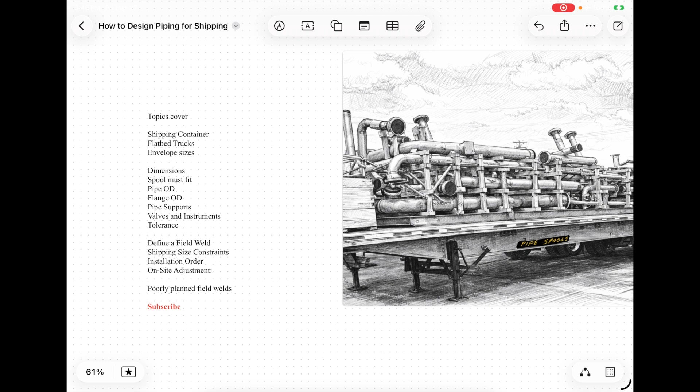Take into account the piping OD, flange OD, pipe supports, valves and instruments, define the field welds, shipping sizes, constraints, installation order. Poorly planned field welds really hurt your design and really hamper construction. So you want to take that in consideration.

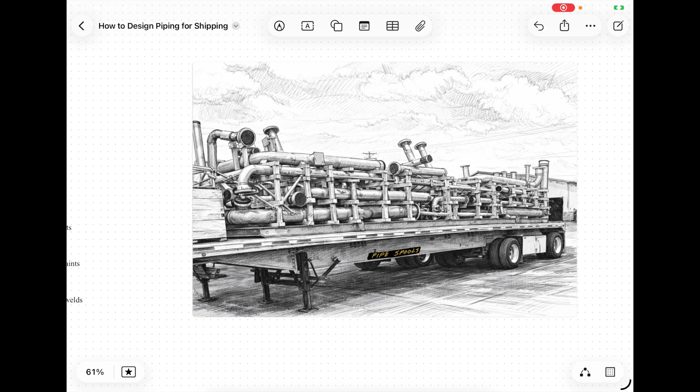Here I'm showing a flatbed with spool pieces loaded up, how the fabricator or the shipper has it with blocks, and how they stack it and safely ship it from one place to the other. More likely from the fabrication shop to location at site, it probably won't be this orderly or need as many shipping supports, but they'll just lay flat on the bed and then be shipped to the unit or to the area.

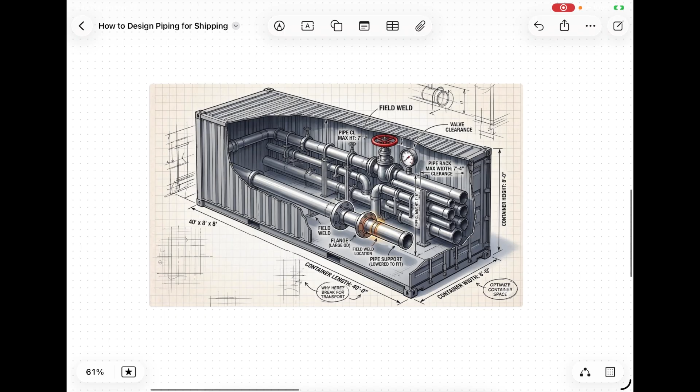If they're shipping it through cargo ship overseas, or it's coming in overseas to your location, sometimes we go to fabricators offshore too. So this is just a rendering of what would be in a shipping container and the sizes. Shipping container size is 40 by 8 by 8 feet. In some cases, it's for small bore pipe.

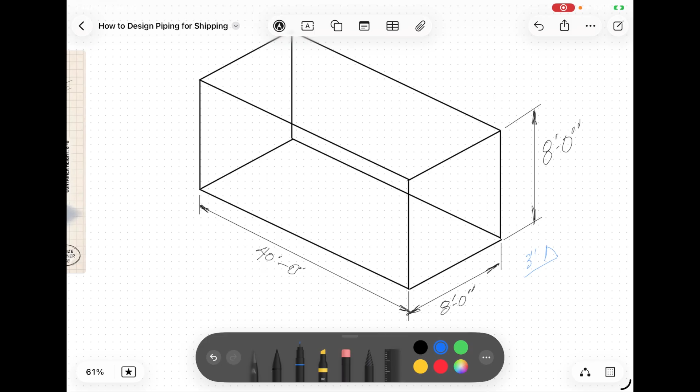Small bore pipe is 2.5 inch and below, and large bore pipe, which is what I'm talking about in this video, is going to be 3 inch and larger pipe that needs to be designed for a 40 by 8 by 8 container.

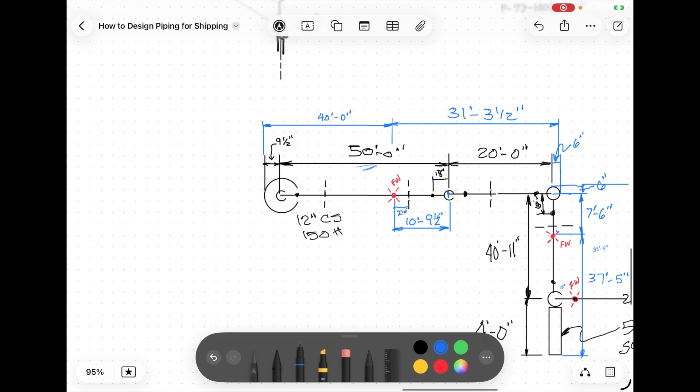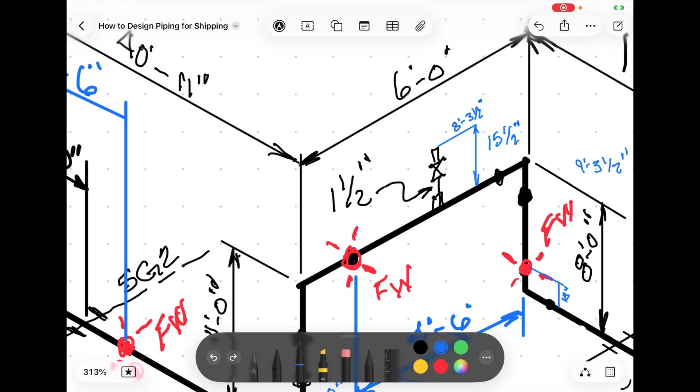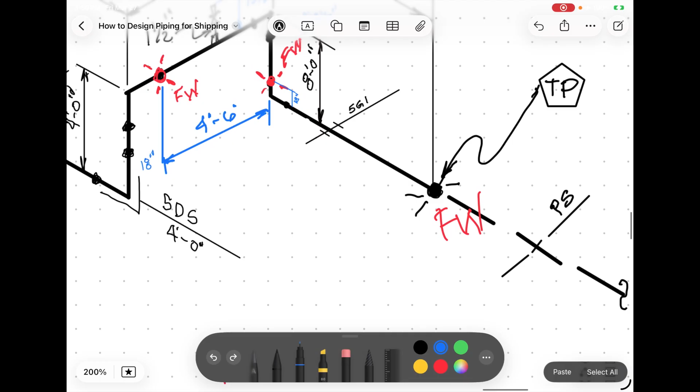So we got a flange here that we got to take a look at. Here's a dummy leg or a trunnion that's sticking out 4 feet that we got to look at also. And then here we have a vent that we need to take into consideration. And in the ISO, I'm imagining it stopping at a tie-in point. So let's go back to the plan view and start at the flange.

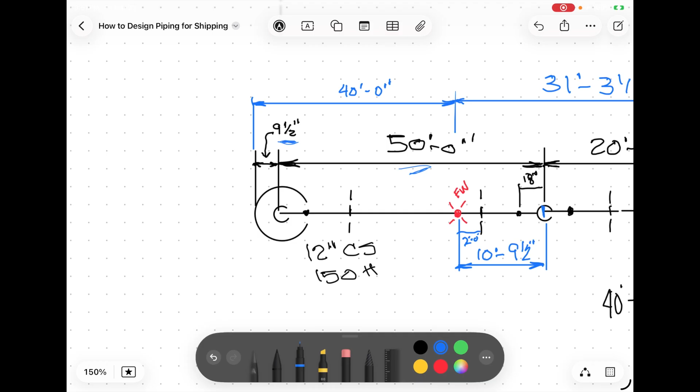So in plan view, we have the flange. We have the OD of the flange. From the center line to the outer edge of the flange is 9.5 inches. So you need to take this into consideration in the design. You don't want to look at just the dimensions that are on the ISO. Like this ISO here, it only says 50 feet, but you know that's not going to fit in the shipping container. So in order for it to fit in the shipping container, we'll break that down.

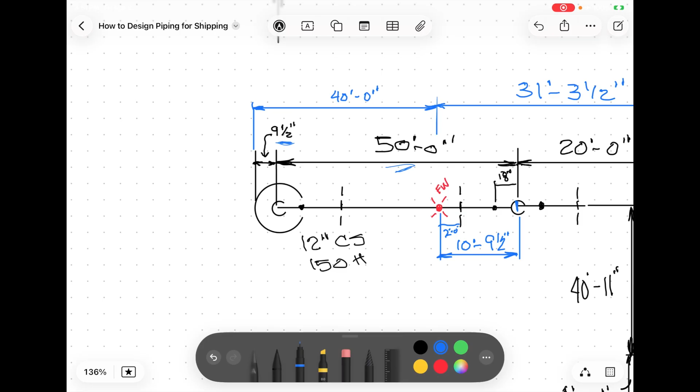So here we need to cut it back. We need to take off at least 10 feet. So that's past the 8 foot support, but we need to make it 40 feet from the edge of the flange to this field weld to keep it within 40. So then we'll need to take out 10 foot 9.5 inches to locate our field weld. So with that explanation, we've cut our first spool piece that'll fit.

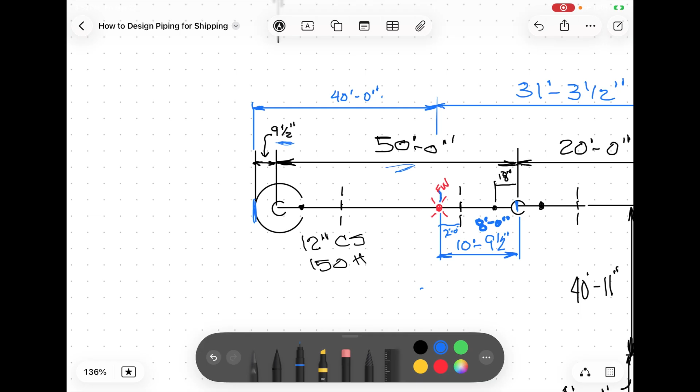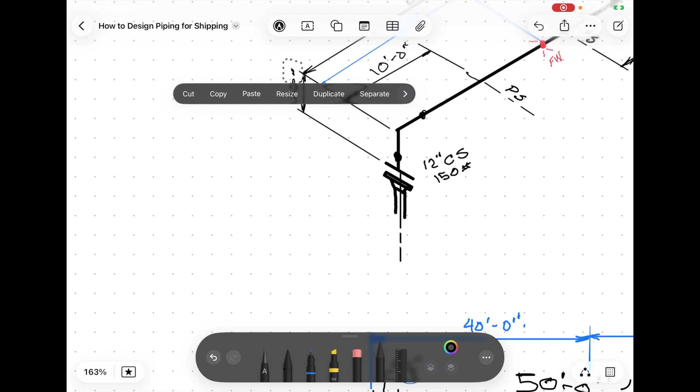And then the vertical, the flange got a vertical of 1'2". So that won't work. So let's just make that 2 feet. Those numbers don't work, because this elbow is 18 inches on a 12 inch. So that number's not going to work. So let's cut that. Just for talking purposes, let's just make this 2 feet.

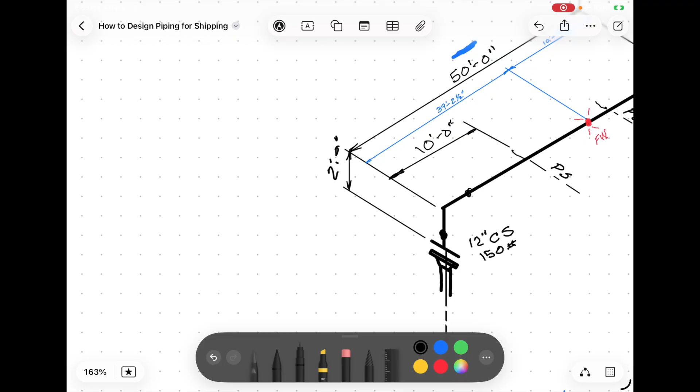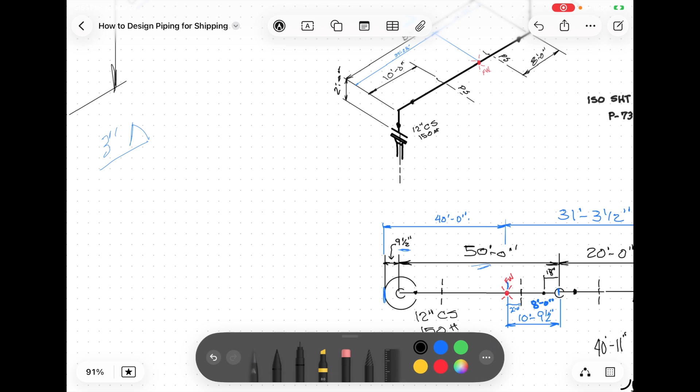Which still fits in our shipping envelope. But I don't want somebody to say, hey, 1'2" is not going to be enough for a 12-inch elbow. So that should work out. And probably have another dot. But anyway, so the spool piece here is 40 foot long.

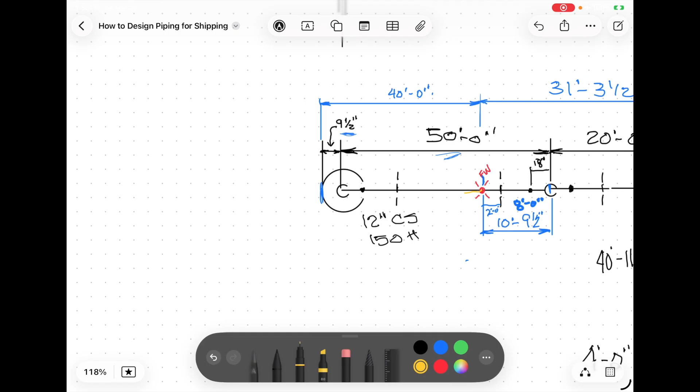So we've located our first spool piece. So we'll highlight that yellow, and we'll call it 001 spool piece.

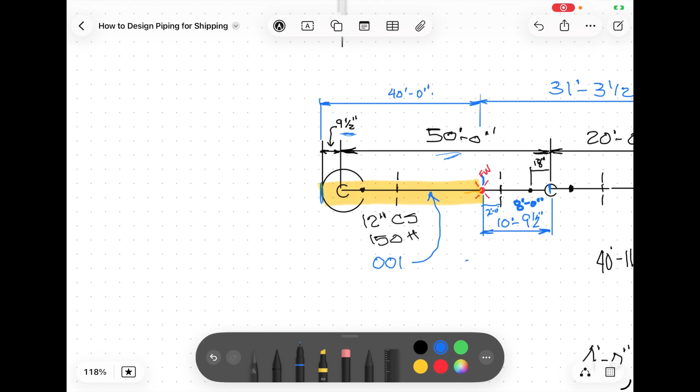Let's break down the second spool piece. So if we're going to break that down, we need to go from the field weld that we just located, this field weld here. Let's go with that. And so we got 10 foot 9.5 to the center line of the elbow, which will cover the point of support.

And then we'll have from the center line of this flange here, center line of this line, we have 20 feet to the center line of this elbow here going down. So with that distance, 20 foot plus 10 foot 9.5 gives you 30 foot 9.5, but you got to take this 6 inches into consideration for half the OD of the pipe, for a 12-inch pipe, right?

So then if you do all that, from the edge of the pipe to that field weld, you got 31 foot 3.5 inches, which is well within the 40 foot length. So then I'll normally break down, okay, so we can add a little bit more here. If I know that this one is well beyond the 40 foot length, then I'll start working my way back from a point. So then I'll take some out of this 40, which I'll take 7'6",

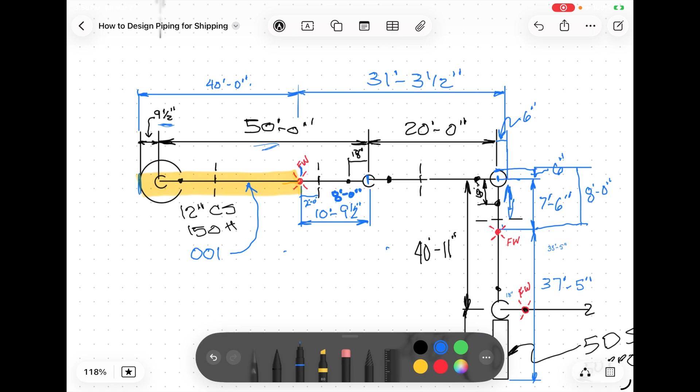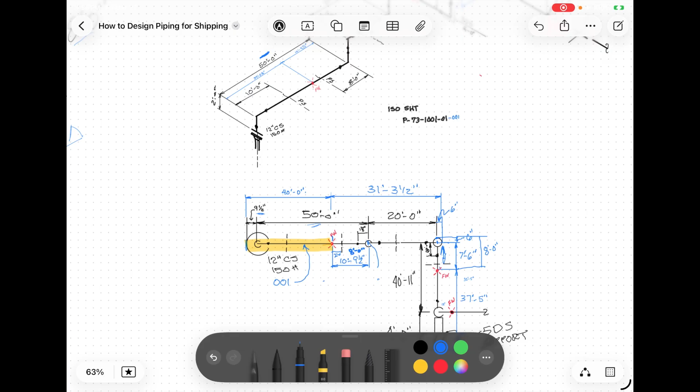But we have an elevation here, don't we? Let's see, what was it? It was 6 foot, so we're still good. So it's 6 foot and then 6 inches for half the diameter of the pipe and half of the diameter of the pipe on the bottom. It gives us a 7 foot overall distance. So what are you talking about, 7 foot?

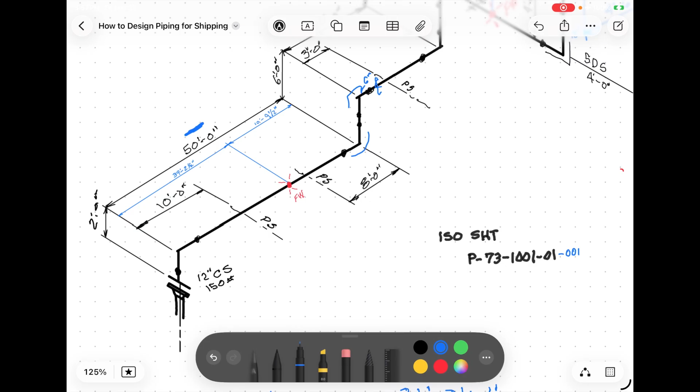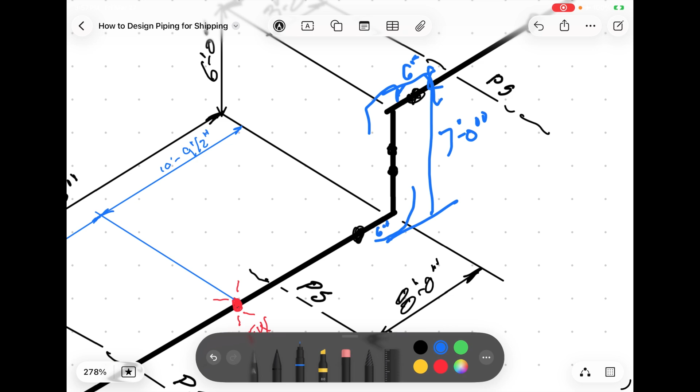So let's pretend we got the edge of the pipe here, and the elbow goes down, and the edge of the pipe that goes here. This represents the center line, right? In here we have 6 inches, and in here we have 6 inches of pipe, half the OD. So these two 6 inches plus the 6 foot gives us an outer dimension of this spool of 7 foot 0 inches, well within the 8 foot, right?

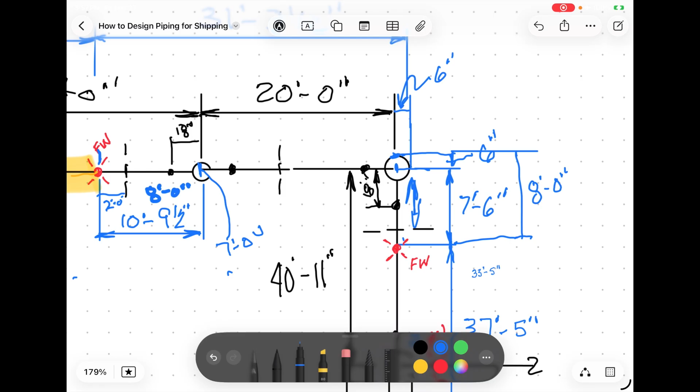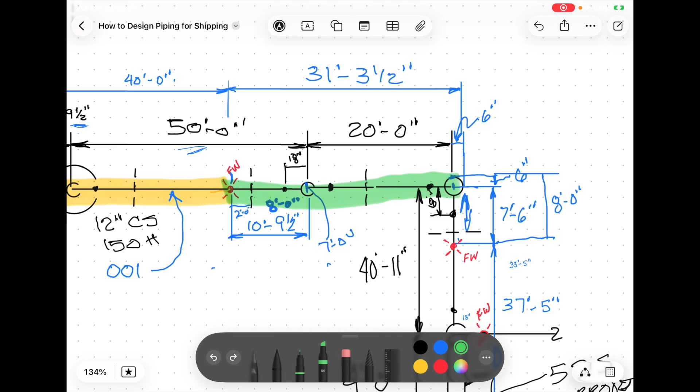So let's go back to the plan view. So then we got 7 foot here in the vertical, and we got our 31 3.5, which is within the 40, and then over here we have our 8 foot. So this fits in the box also. So let's color this spool piece. Let's highlight that. Oh, wrong color. Let's go to green. So this is our second spool piece here, vertical.

Let's go to the ISO. On the ISO here, I got it at 7'6", but you got to add that little piece, like I just said, the half diameter of the pipe, so that'll make that 8 foot. So we've got our second spool piece here, here, here. So that's spool piece 002.

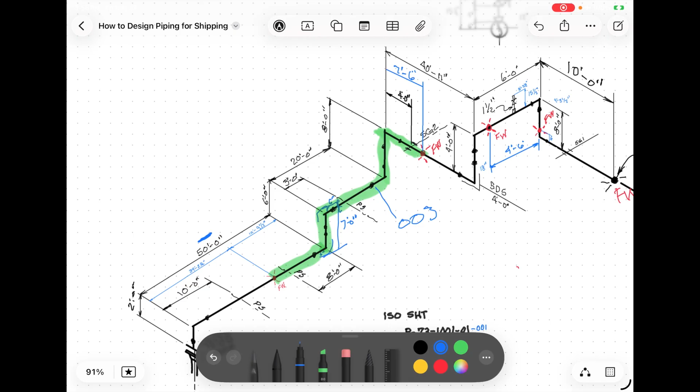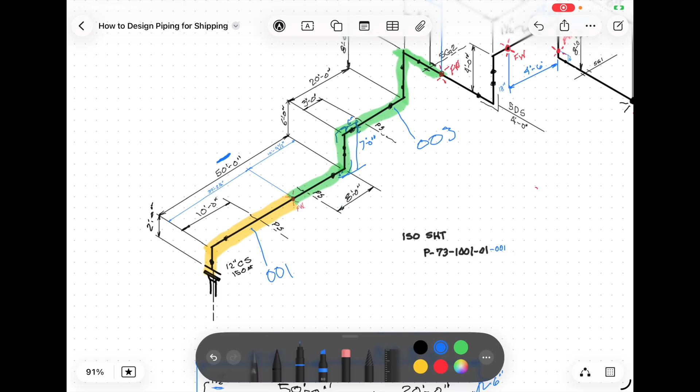I guess we better do this one too. This is yellow. This is spool piece 1, spool piece 001. Oh, I'm sorry, this is not 3, this is 2. Spool piece 2.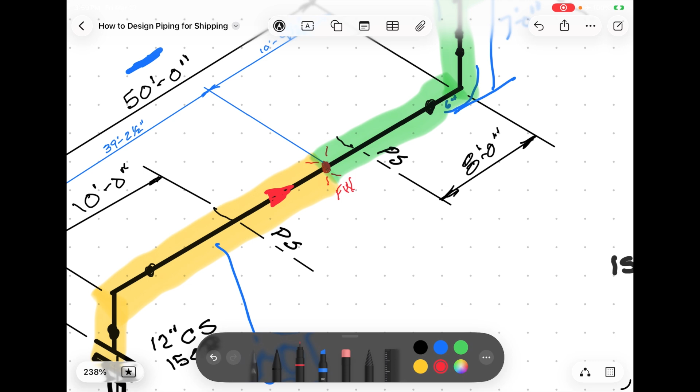And I like to keep them with the flow. It depends on your lead or the project or who you're working for, but I like to keep them with the flow. That's what I tell the designers that I'm working with. So we'll keep the spool pieces with the flow. So let's go to spool piece 3.

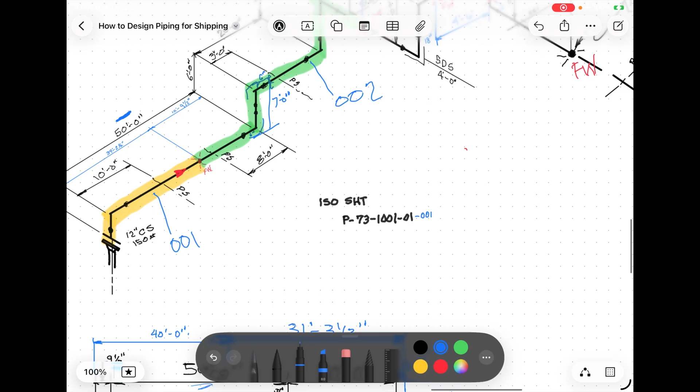Spool piece 3 is a little tricky, but it's good for you to learn that you got to take this trunnion, this 4 foot trunnion. It won't be dimensioned on the ISO, but it'll call out the support. Nowadays, they normally just call it out, it's the 5DS, for instance, for talking purposes.

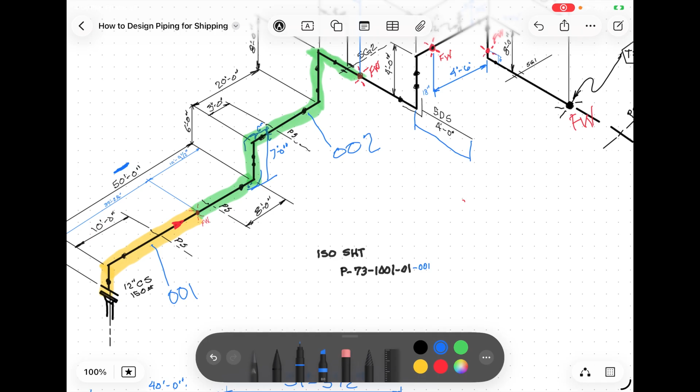And it's got 4 foot. 4 foot what? It sticks out 4 feet. It's something that you've got to take into account. Experienced guys know this. Inexperienced guys, it's something they've got to learn. So that's the 4 foot right there.

So if we go to the plan view, we have 4 foot, and then we made this cut a few minutes ago at 8 foot. So that leaves our 40 foot 11 to the center line, minus the 8 foot, plus the 6 inches, gives you 33 foot 5 here. And then with the 4 foot gives you a total length of 37 foot 5, which creates our second one.

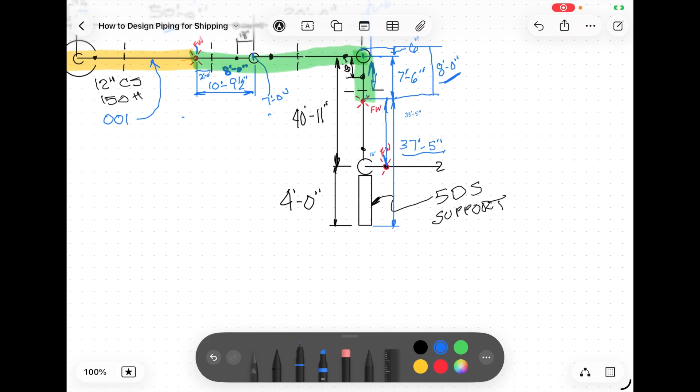But we have a vertical here too, don't we? So what was the vertical on the ISO? The vertical is 4 foot plus the outer, so that's adding a foot to that. So the overall there is 5 foot. So we have a vertical here of 5 foot, which fits within the

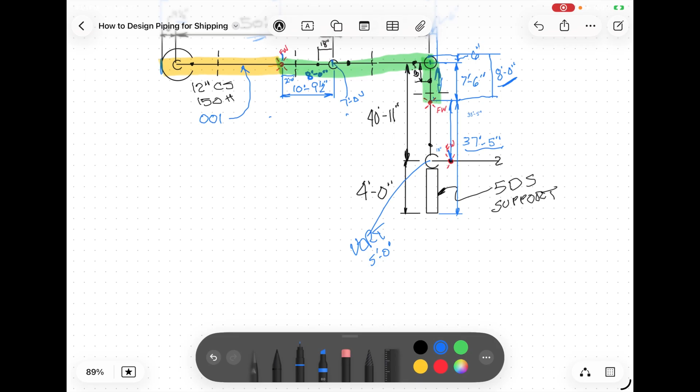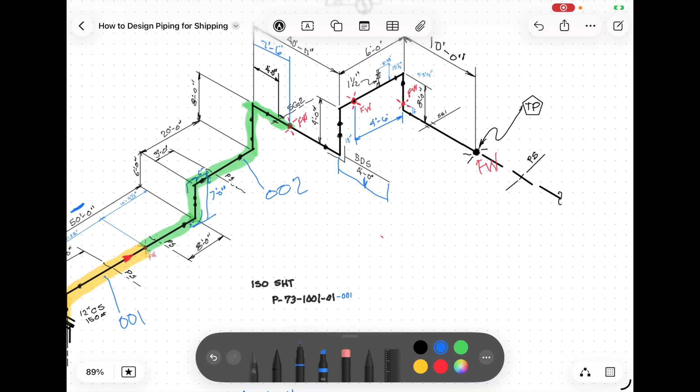shipping container. So in this one we have a shipping container, and I did the field weld there because if you do an overall look, this is 6 foot plus the outer 6 inches, and then we also go up with the vent valve. So we'll need to take that in consideration, but let's finish this one here, and we'll highlight this one blue.

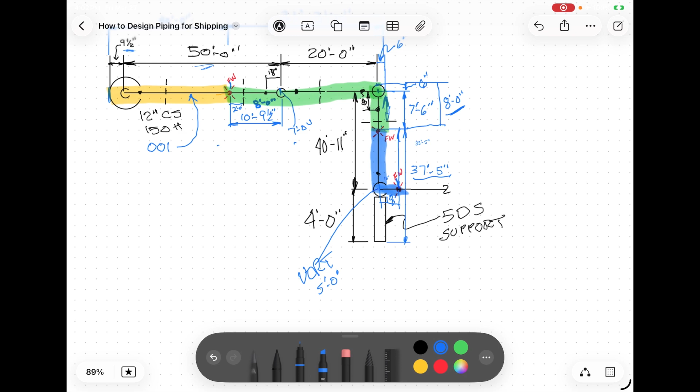And this dimension here is 18 inches. From the center line to the center line is 18 inches. So this spool piece is well within our 8 by 40. So let's just break the rest of it down on the ISO. Since we got the parts pretty much broken up, I have the ISO here. So this was spool piece 3, right?

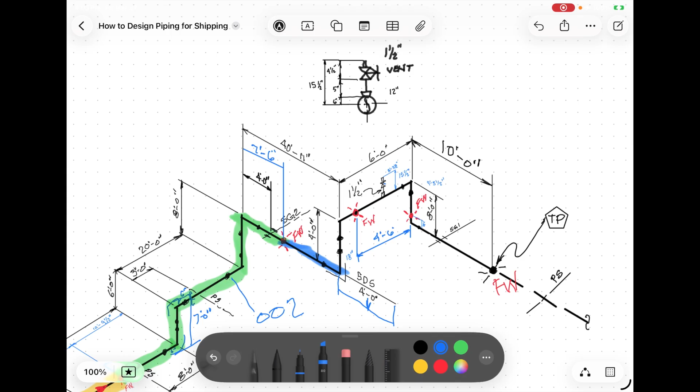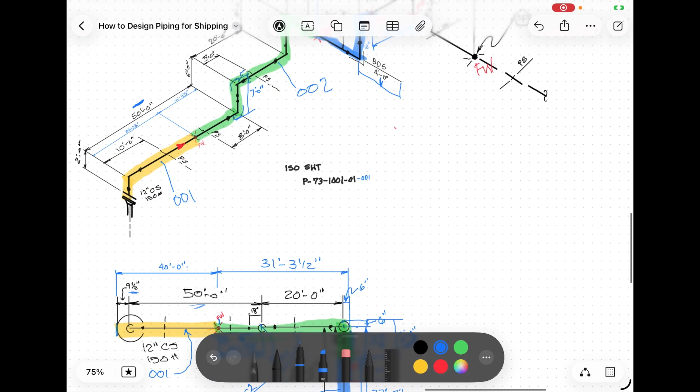Yeah, I didn't number it down here either. So this is spool piece 002, spool piece 003. And let's go look at the 4th spool piece. Here you have the vent. So I've broken it down: a 12 inch by 1.5 inch olet with a 3 inch nipple.

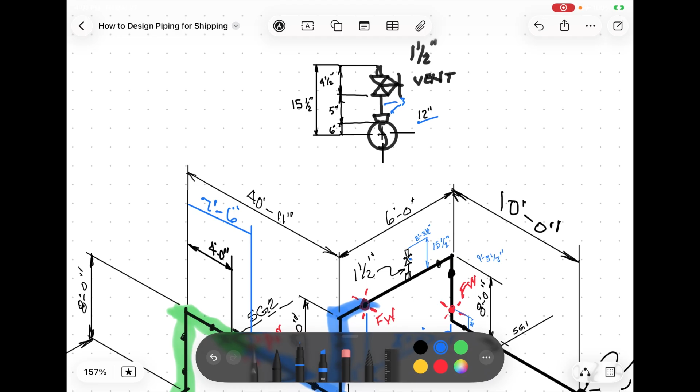So I'm saying it's a total of 5 inches, and then the valve and the bull plug, which I'm saying is 4.5 inches. So in total, from the center line of the pipe to the edge of the bull plug is 15.5 inches. So with those 15.5 inches, when you're breaking this spool piece out, it's 8 foot. So with adding the 15, you're already over the 8 foot distance.

And this is 4'6". So then we'll take the 18 out, break this up a little bit to get it back within the 8 foot. So if I don't put this field weld on, it will be oversized in 2 directions. We'll have almost 9 feet in the vertical here, which we don't want, and then we'll have 10 foot here. So we need to break that down and just break it out into 2 spool pieces.

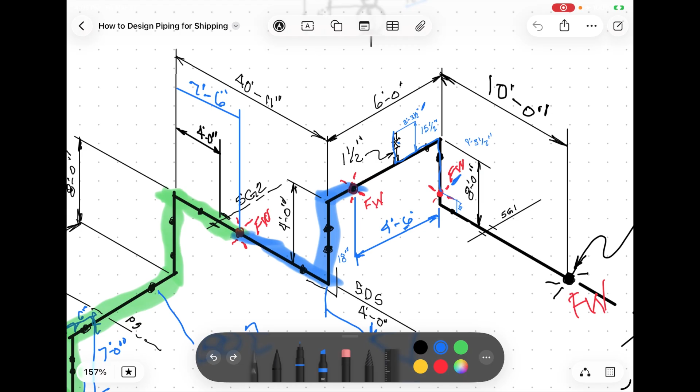This is 4'6" by 8 foot 3.5. So this 8 foot 3.5 is going to have to be considered as the longest piece, which is over 8 feet. So it'll be in the 40 foot direction to fit in the container, which will be from here. All this will be over the shipping length. But let's get back to finishing this out.

So we added the 15.5 inches, and we worked it out to where we've got to take the 18 inches off to locate this field weld, and that'll give us a spool piece of 8 foot 3.5 inches. So that'll be our fourth spool piece. So this will be 004. Let's color that one yellow. Nope. Let's color that one yellow. Okay.

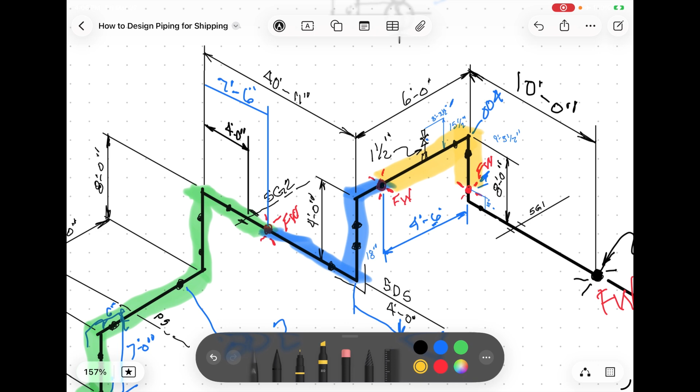So then we come up with our last spool piece, which is 10 foot by 18 inches. 18 inches is the elbow for a 12-inch line. So then that'll be there. So this will be our fifth spool piece. Sometimes you've got to break them down to small pieces, but as long as they fit in two directions, you should be all right. This is our last piece here. Let's color that one red. From there to there. And that'll bring us to our tie point.

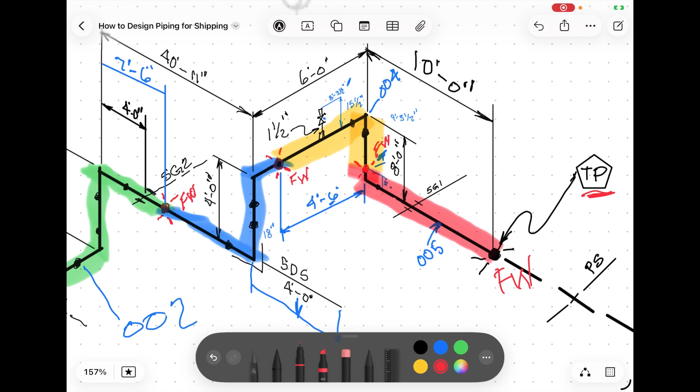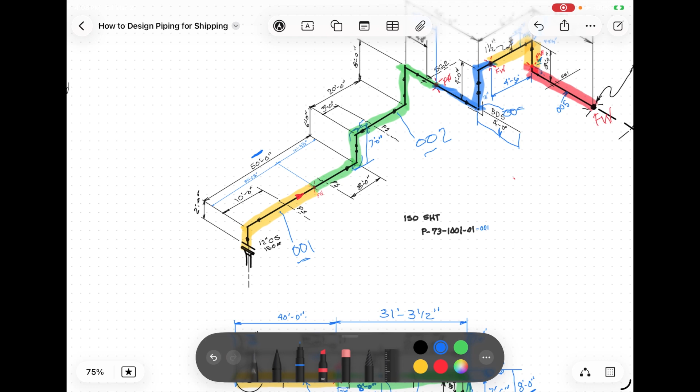And that is how I typically take a look at the spool pieces. One thing to add, you can see we have 5 spool pieces. And with these 5 spool pieces, 1, 2, this one's spool piece 03, 4, and 5. So typically on the spool piece number, it'll be the ISO sheet number.

So in this example, it's the fluid code, the unit, the line number, the sheet number of the ISO, and then this will be where the spool piece number comes in, in most cases. Most companies do it that way. Maybe it'll be a whole gyration of numbers, dashes, no dashes, but this is the spool number.

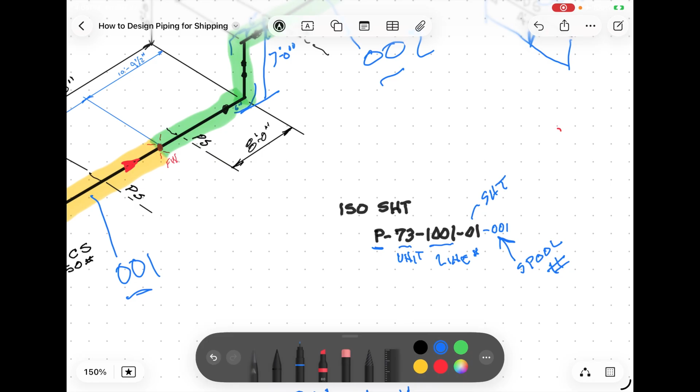And this will help construction locate the unit, the line, and then this will tell them what ISO it's on, and then this spool piece. And then your ISO will have each one identified in your material for the fabricator.

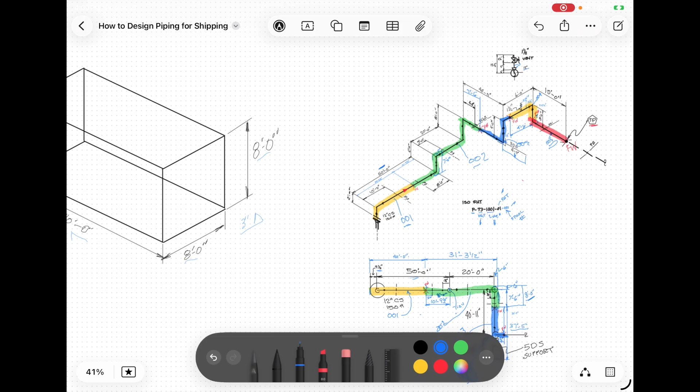So in design, we'll create this whole spool, this whole ISO. I would put all this on one ISO. That's why it's not that complicated with valves and everything in it. You could probably fit 5 spools. Maybe you need to break this down to a sheet here. Let me get a little bit neater than that.

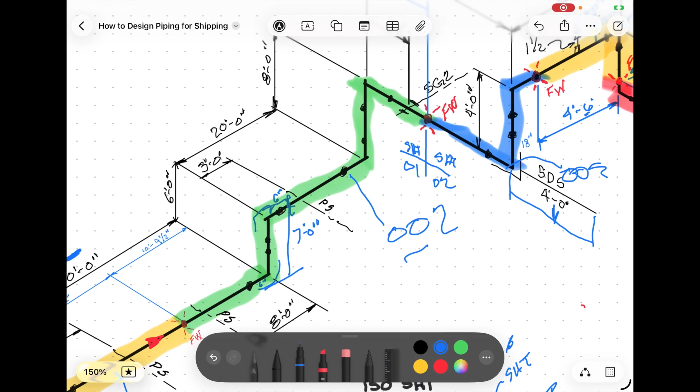So this here will be, if you break it down by sheets, this would be sheet 01. This will be sheet 02. If that's the case, then your spool numbers will start over because they start over on the line on the sheet. Most people do it that way.

Some people start from 1 to whatever, but typically on S3D, if you do the sheet number here, sheet 2, then this will be your spool piece 001, and this will be your spool piece 002, and this will be your spool piece 003.

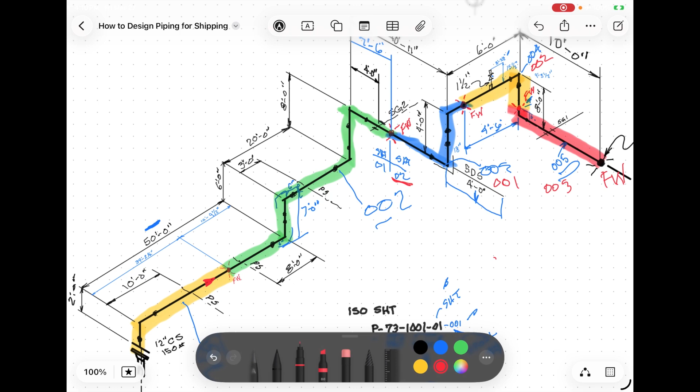Typically now in S3D, this is all broken up for you, but this is the thought process on how to design piping for shipping that you need to take into account. A lot of people nowadays just route pipe in the model, make it look pretty, but there's a thought process behind it, and I hope you get something out of this.

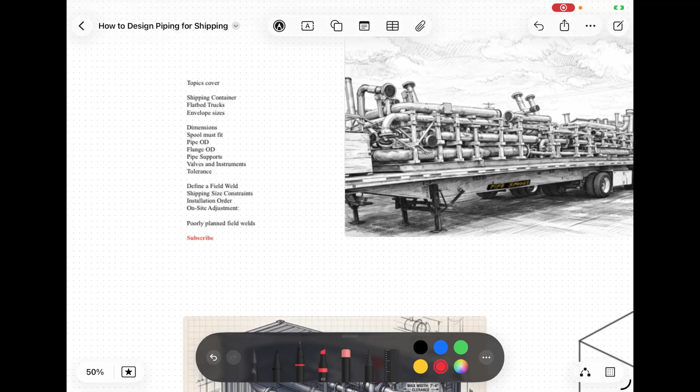Again, let's go down the list here. Maybe I covered everything. Shipping container. We showed you the flatbed. Envelope sizes, dimensioning, how to dimension it, sketch it out. Spools, they've got to fit inside whatever the project decides needs to be the spool. So this needs to be asked early on by the designer.

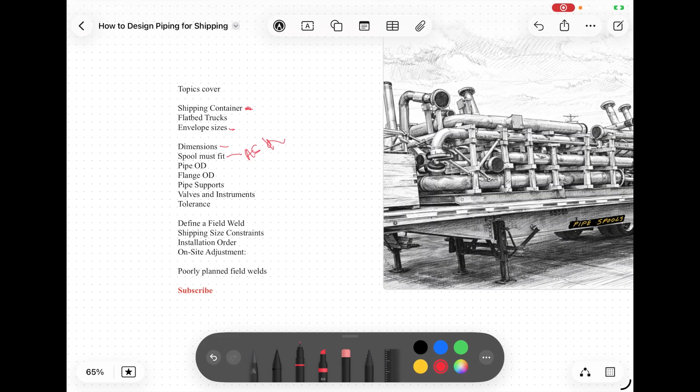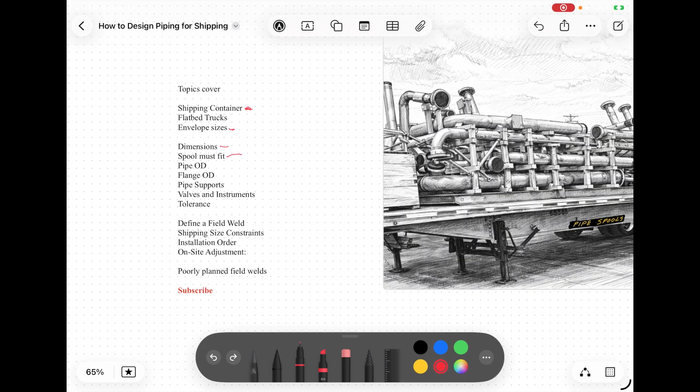Typically after all the piping is routed in the model, it's normally turned over for ISO production. Once you go into ISO production, the sheet breaks and the spool pieces need to be identified. And like we just did, the identification is typically by doing something like this on your breakdown. A lot of people take the easy way out and just start putting field welds where they feel they should be.

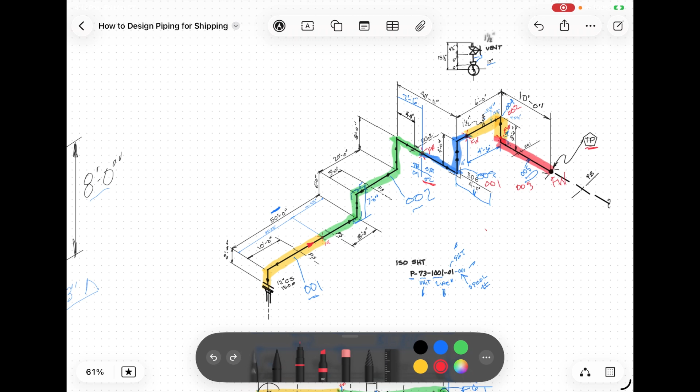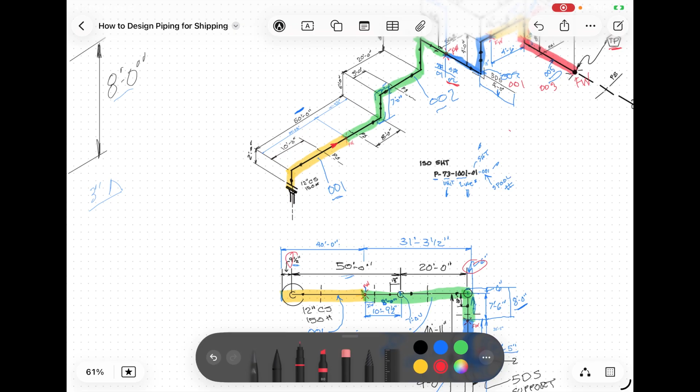If you want to be a good designer, you need to take your outer flange dimension like we did here, and you've got to take your outer pipe dimension. You've got to take your support location. You've got to take these into consideration. Junior designer, mid-level designer, senior designer, this has got to be looked at. Checkers are normally more experienced, and they go back, and you don't want your checker kicking it back for a spool piece change.

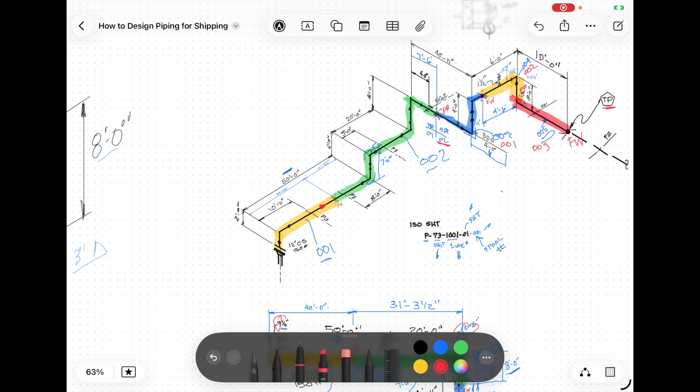Just keep in mind how you need to design. OD of the pipe, OD of the flange, supports, valves, vent valves, instrument valves, take that into consideration. Sometimes once the fabricator is done with it, he'll turn it over to shipping, and sometimes shipping has a little bit of tolerance, may add 3 feet to the 40 foot, or a few inches to the 8 foot. It's acceptable.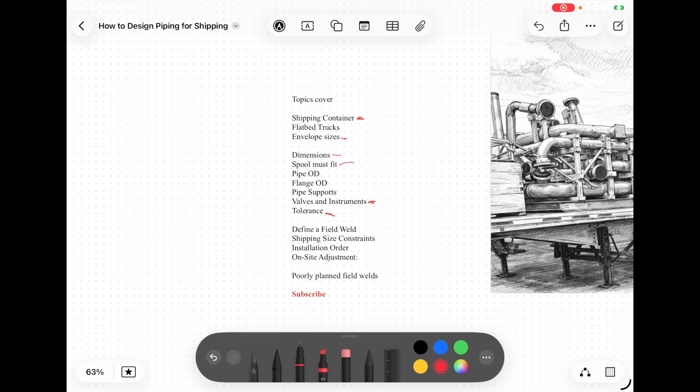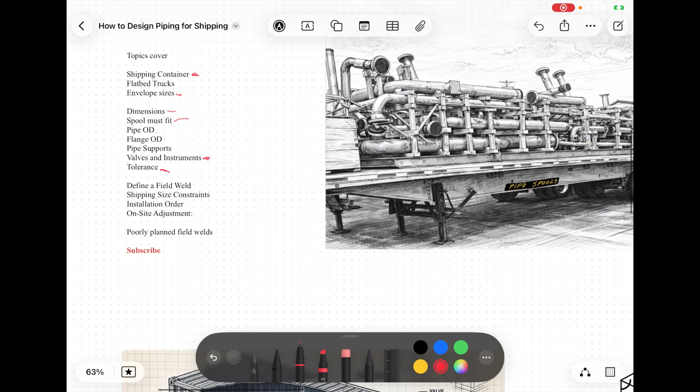Containers, I don't think it's acceptable, because it's set on what size that needs to be. On the shipping containers I don't think you can get away with getting a few inches over, but on a flatbed you may be able to get away with a few inches over. Always ask your piping engineer or project, or your purchaser. The purchaser normally is talking to the fabricator.

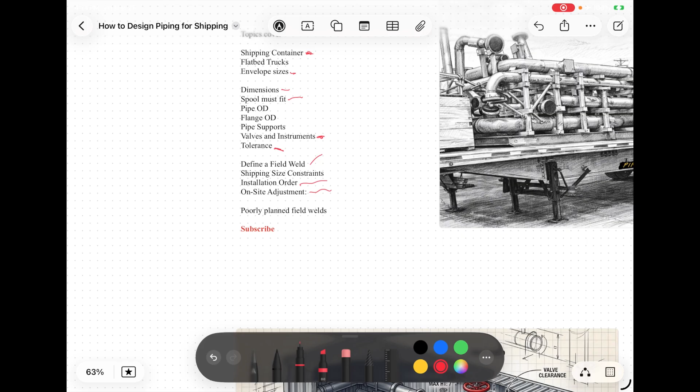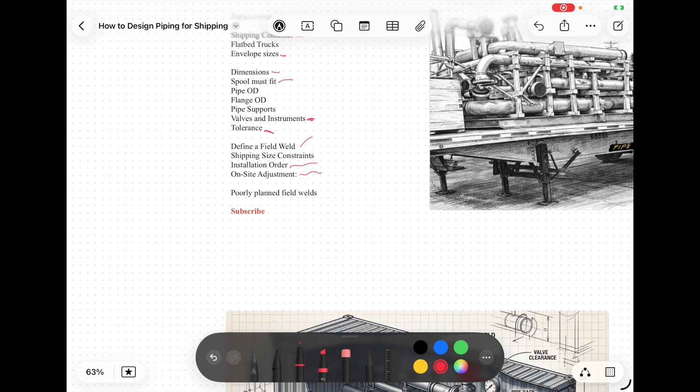Define the field welds, shipping sizes and constraints. Just talked about that. Installation order, talked about that. On-site adjustments. Sometimes with the smaller spool pieces, they have on-site adjustments if spool pieces are misfabricated or not designed to the ISO or to the spool sheet that the fabricator did. Sometimes it's lost between the isometric and the spool sheets, and sometimes dimensions are off on that. But anyway, they can make on-site adjustments.

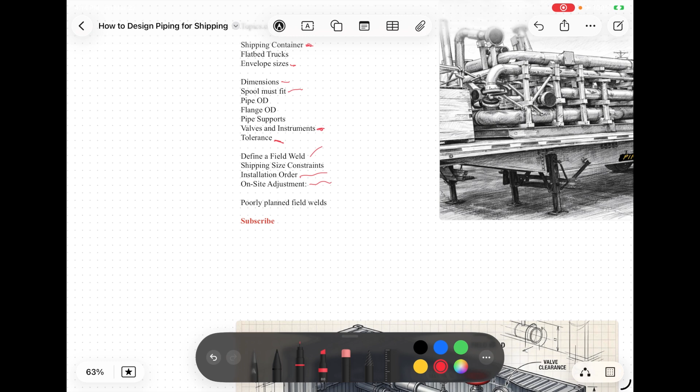And please do not poorly plan your field welds by just going in there and getting a gut feel where the field weld's got to be located. Have some thought behind it.

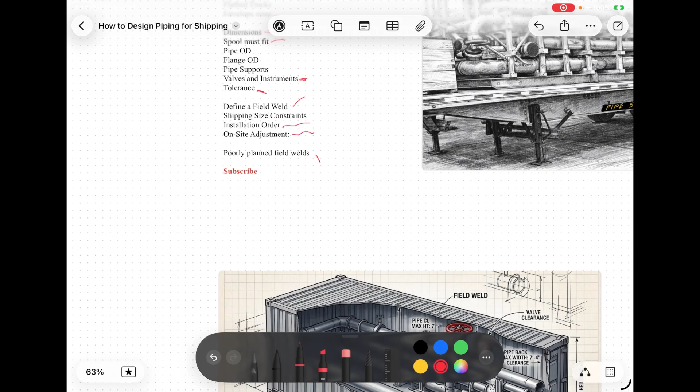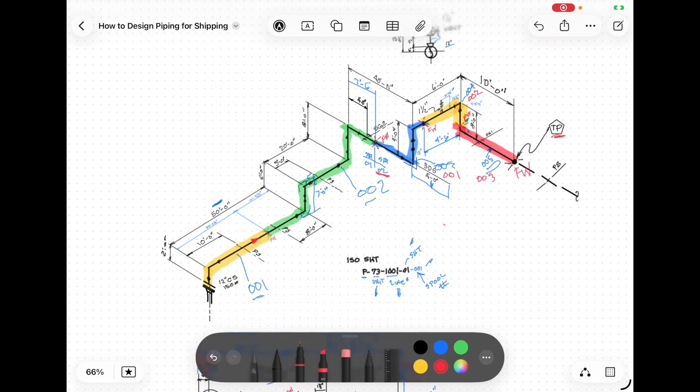So always check with your piping lead or your piping engineer to verify the dimensions that are required for your specific project. You need this to do your design and to do your layout, especially for ISO production. This should be on your job notes somewhere.